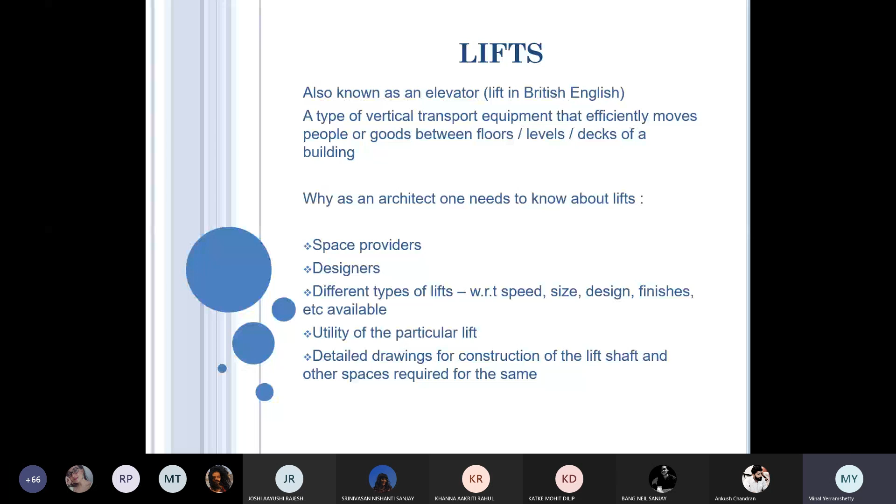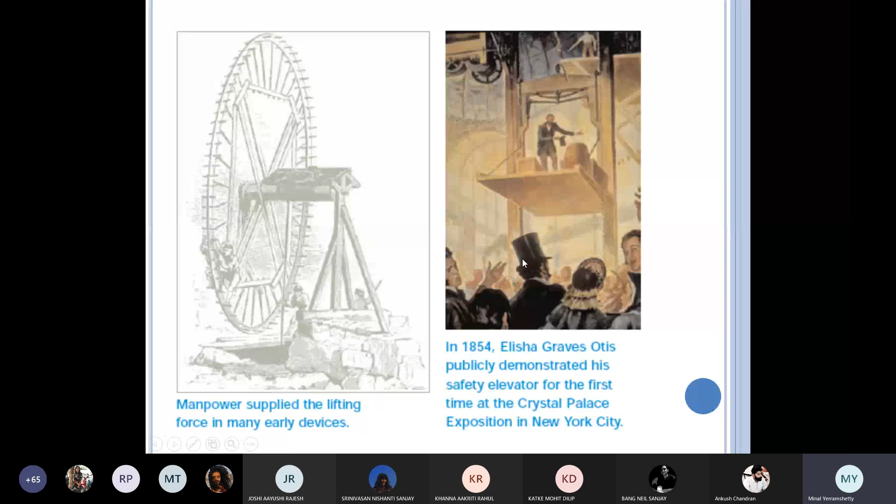Can you see the change here? This is some history where I'm sure in your TOD all of you have learned about the Crystal Palace exhibition that happened. It was a big talk of the town, a wonderful building created and then destroyed, all that happened. So this was the time when the first lift was actually used. On the left hand side, you see people manually rotating that wheel, like a London Eye you have in London, which is obviously now operated by machines. But this was how they used to have it in olden times. Based on this, you get an idea of how people would use lifts in the olden days.

These are some of the earliest buildings where lifts were used in a very preliminary manner. If you've seen this picture, in any old movie, or even a recent movie like Kahani, in which I think Vidya Balan acted, that lift box was really old. Kolkata has all these colonial buildings, so it was one of those buildings. She stayed as a guest there, and the lift actually still belongs to the colonial era. It was like a big box, like a room, which was going up and down. It had this big jali, a collapsible grill, which would open and shut, no doors, and you could actually see the whole thing happening. So that was how an old lift looked.

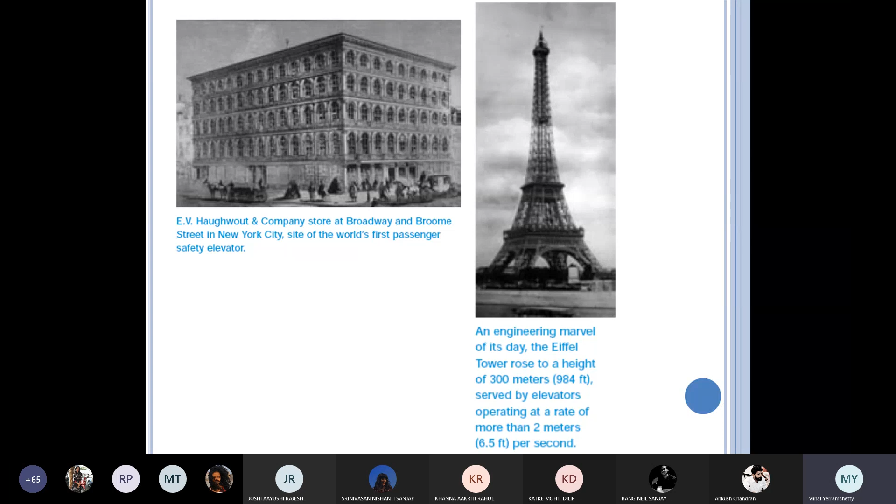So you can see that even the Eiffel Tower is so old, and at that time, at 300 meters, they had already kept elevators there.

Let's look at the types of lifts we have. Every one of us is aware of this - the passenger lift. That's how a normal building will have it.

Passenger lifts will depend on the building. If it's a very large building, say G+10, G+15, G+30, depending on the number of flats per floor and people in the building, you'd have a lift for 4 people - a chota sa lift. You could have 6 people, or 8 people capacity. But that's the limit - you won't have 10, 12, 24 people.

That happens in a very large institute or where traffic is very heavy. No matter how big the residential building is, traffic will always be nominal because only resident people will be coming. Half, or maybe three-fourths of people are not working - children, old people, you minus them out. Majority of housewives in the Indian context will not be working. So the peak time only caters to people going to office - it's not so heavy traffic despite being tall with large density.

But the same building with the same density changes if the utility changes - say it's now a mall or an airport. Suddenly the lift sizes have to be bigger because at certain times the density that needs to be catered to will be very high. Say there's a Diwali sale, or a Christmas sale, or a new trend now - a July sale, because in the monsoon nobody goes out, so they tempt people to come out. That's how malls function.

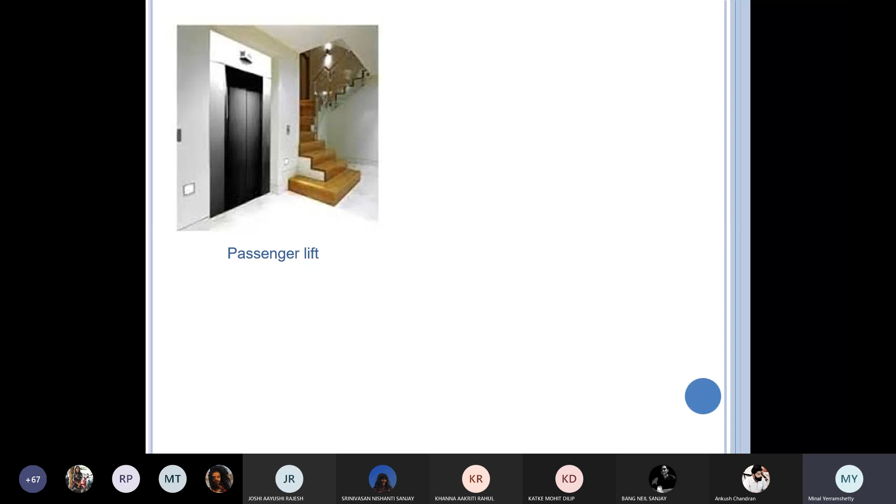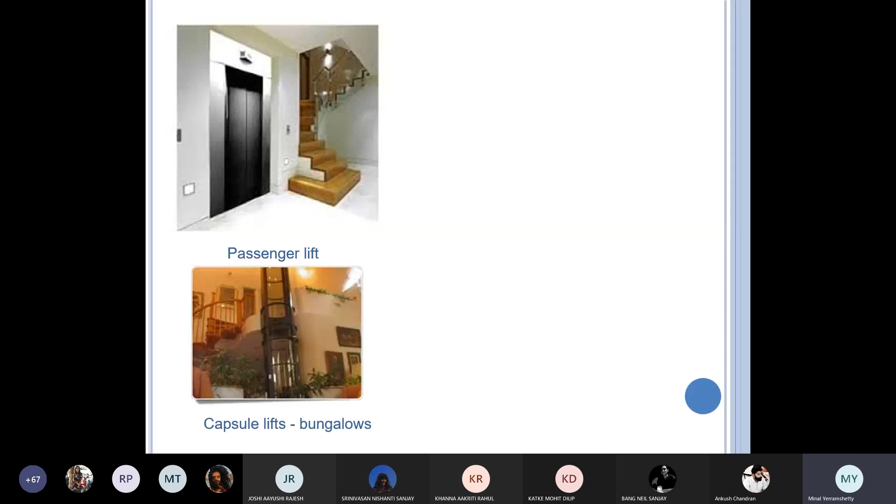So depending on the height of the floor, your passenger lifts are planned. You have capsule lifts for bungalows - where you have a very lavish kind of bungalow, G+2, with lots of rooms and a centralized atrium. Then you'd go for a small capsule lift which can even work for small bungalows, or you can go for these kinds of capsule lifts in hotels or any building.

I'm just saying hotels, but it could be for hospitals, airports, or any kind of tall building you need to go for. Basically, a capsule lift allows you to have a view, so it's very decorative in function. Of course its function is to take people up and down, but it's also a very decorative feature of the building.

Generally it can be faced either interior or exterior. If interior, you need an atrium so the lift faces the atrium, and while people go up and down they can view the entire inside of the building. If exterior, obviously they see everything around. That's how it's planned. Definitely you would not place a capsule lift facing a corner of the floor - kuch nahi dikhega, pointless hai.

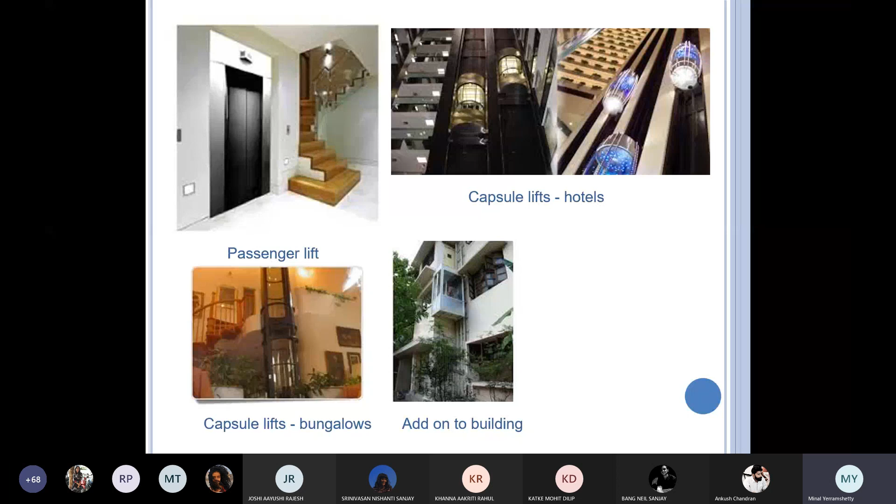But one has to be very careful while planning this, especially with material. Imagine this door opening - people could fall if any malfunction or technical problem happens. At least in a shaft, people will not fall off. Second, if this is glass and it gets broken, and a naughty kid traveling tries to look down, bends over and jumps down - it's a problem. So this is a little dangerous from that point of view. But otherwise, this is the cheapest way of installing a lift in an existing building if the need arises.

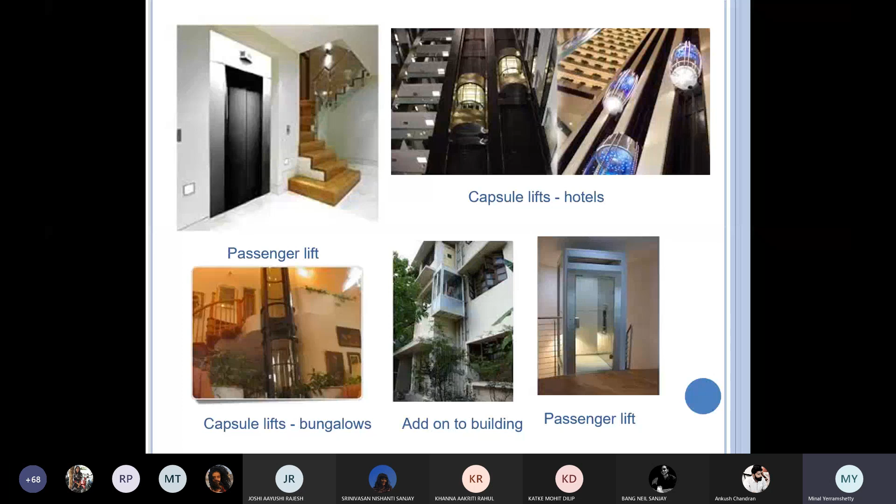Another view of the passenger lift. What you see here are the number plates on top. Sometimes you see a number plate on the side showing which floor the lift is on, so you can at least judge how much time it will take for the lift to come down. So all that is an accessory that needs to be there with your lift.

And the types continue. The other types of lifts that we see in different kinds of buildings, which we as customers generally will not see, are the dumbwaiters. Dumbwaiters are used in extremely high-rise five-star hotels or eateries of that kind.

So say in a mall, the kitchen is located elsewhere for safety reasons. The fire officer said you can't have kitchens on top, so the kitchen has to be at the basement or ground floor. That part of the mall area is cordoned off for services, but the cooked food has to be taken up ASAP. That's where dumbwaiters are used.

Basically, it's nothing but a lift that is programmed specifically. The size allows a trolley to enter along with a man. If you see the outside, there is generally a sloping kind of arrangement, or the lift has to be programmed very precisely.

Sometimes lifts do not align exactly with the level of the floor, maybe due to some technical problem. But in dumbwaiters, it has to happen perfectly. Otherwise the trolley will move, and say you are carrying soup, a little jolt and everything will spill. So it has to be very precise, and that's why that slope and everything is managed.

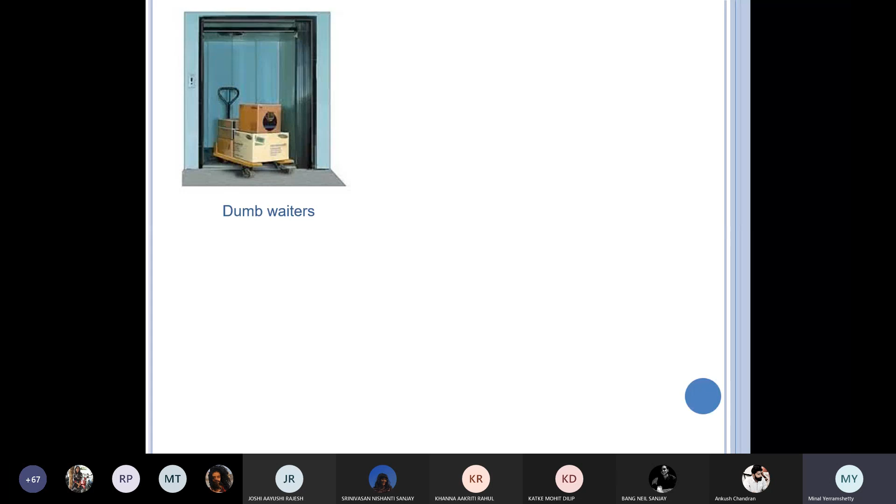That's why the Taj charges you 7,000 per day, because they give you that kind of service. You would get very piping hot soup no matter what time of day. So yeah, that's about the dumbwaiter.

Then there are car lifts that you see nowadays, something called hydro jacks, which is a hydraulic jack, seen in car parks especially in Mumbai. This has become a very popular way of parking cars, where you just drive the car onto the jack, park it, come out, and press a switch, and the whole thing rises up so another car can come down and park.

This way you can use the space very well, but what about the height? To utilize height, since Bombay has a space crunch, these are some of the methods being used. Now, instead of just having a rack, if I cover the rack with a room like this, it becomes a car lift.

The function remains the same as a lift, but this is as big as the largest car, and it goes up and down. Again, if you see the edge of the lift and the floor, there is a steel plating there. This is a very rough and tough area with a lot of maintenance required as a whole car comes out, so anything can go here. It's meant to be very sustainable and very strong, and that's why generally a steel plate is inserted there.

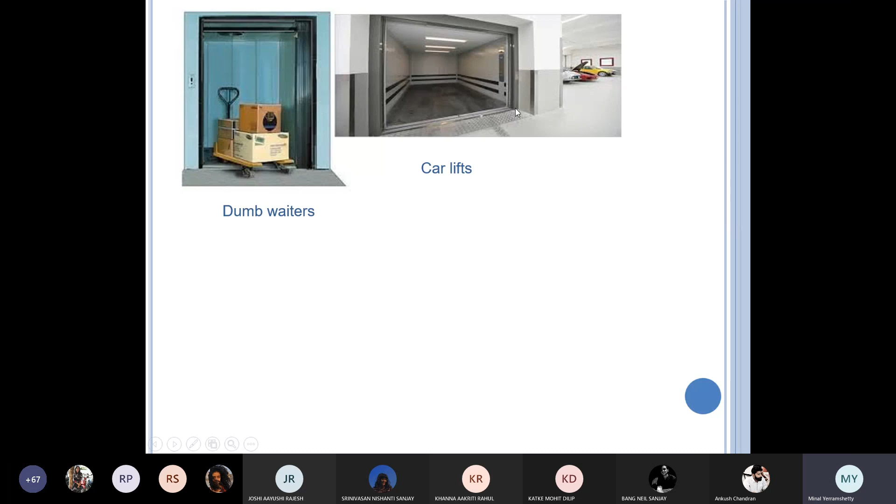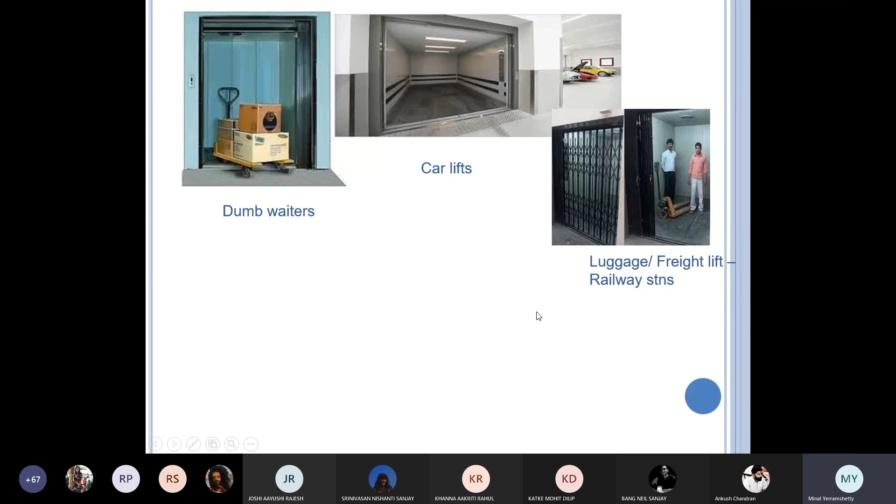This is a luggage or freight lift, railway station. Coolie people use this. Or you will see this even in an airport area where you have to take huge luggage from where you sign in to where the cargo is happening. You will not be using these lifts, but the people who are taking your saman from where you checked in to where the plane is resting, if it is up and down, will have to use these kind of lifts. Otherwise, those small lifts would need too many trips to get 200 people's saman out. So these large lifts are known as freight lifts or luggage lifts, used mainly in metro stations, airports, or wherever you have warehouses.

Stair lifts are for accessibility purposes. So old people, or even young people who are having some major health issues, or physically challenged people, for them these are the new kinds of accessible lifts that are available. All you need to do is install a track on the side of the stairs, and you fit this thing there.

It's just that this is very inviting trouble for children. The children would love to operate this and kind of play with it, and that's where the problem lies. So one has to be careful - this has to be monitored.

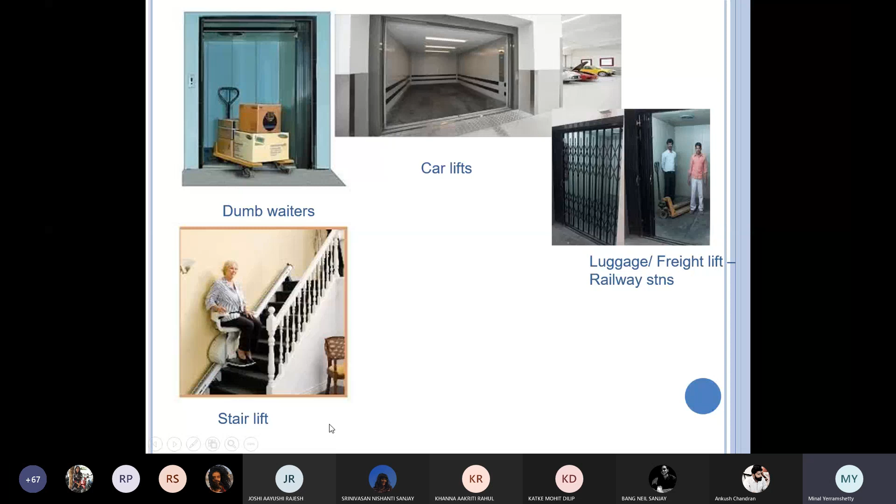The stretcher lift that I was talking about, for hospitals, is a very narrow kind of thing. So here too you will probably have one stretcher lift, or a stretcher lift which has two stretchers simultaneously going in. If the hospital is catering to really heavy loads, you will have people coming and asking certain things, because they can tell you that if I have to take one stretcher from say fifth floor to 10th floor, traveling 5 floors, what would be the time required?

When you are preparing patients for operations, the minutes matter. Sometimes they are in a crucial position, and if they have to be transferred to the operation table, that is very crucial. So these are the people who can actually tell you what will be the time taken by the lift from fifth to 10th if it is going straight.

Sometimes certain lifts are programmed in a hospital such that if the operating tables are at a certain level and ICU is at a certain level - generally ICU and operation should be together, but if they are not for whatever reason, then direct lifts go there. So nowhere will it stop. The control will be only from within. So even if I keep pressing, it will not stop, because somebody else inside who has higher priority to reach the operation table has already pressed the operation table floor.

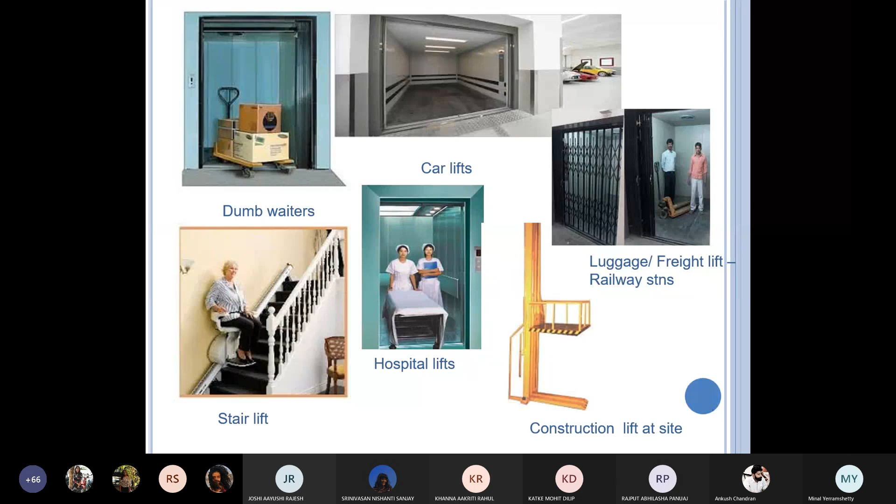So the different types of lifts we covered were passenger, capsule, and fire lifts. Fire lifts we already finished discussing in the fire section.

So customized lift, if I have to tell you, it is like this. Say you are assisting somebody, a king of Estonia. I'm just saying, probably there is no king there, but if you are the architect assisting him, and he has ordered a suite in Taj at some level, there will be specialized lifts going to that level, only for VVIP, very very important persons.

For them, customized lifts will come, and designers go mad, using lavish kind of material. There will probably be sofas inside, because the person will not be able to stand when it has to go from zero to say the 28th floor. So there will be nice seating available inside because it is customized. You can do what you want, maybe even put a bar inside. Who knows, I've not seen it, but I'm just telling you. Customized lifts have no limits, it is up to you.

So essentially, what I want you to understand is, if it is a nominal lift, you will have proper brochures available. You can see famous lift manufacturers here: Otis, Kone, Schindler, Mitsubishi, ThyssenKrupp, and many others. These are some of the most famous and the best ones, and there are many others.

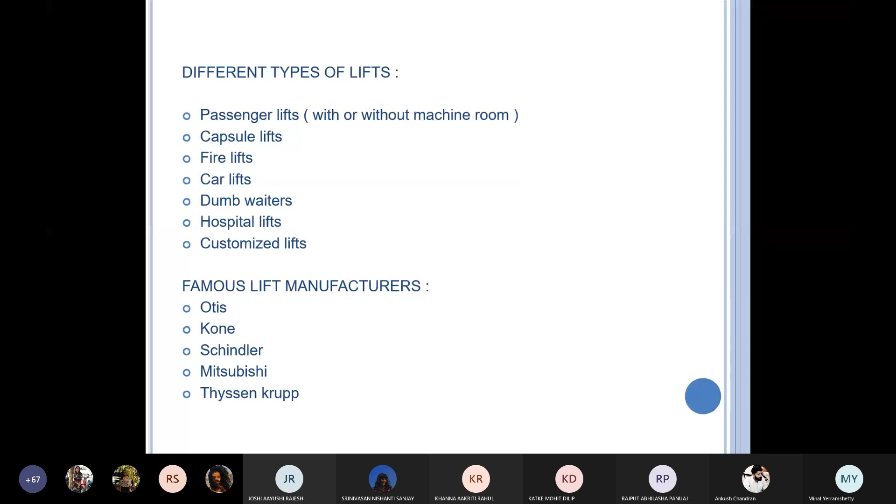So how do you select? You have building height, definitely, because height will increase the density. Occupancy load, as I already said, is not a problem in a residential building because it is fixed: this many flats, this many people.

But not so in a mall, because during Diwali it is going to be a mad rush there, but otherwise nothing happens. So when you have to struggle with this kind of floating population, it's a big problem of assumption. Even architects are not the right people for doing that, so you will have to figure that out, and we have people who will help you with that.

Customer expectation, what do they expect? When I talk about speed, I'm talking about hospitals. If I'm talking about capacity, I'm talking about malls. A person who goes to a mall doesn't care much about speed. He is not in pain, he doesn't have to go operate some crucial operation, nor is he in need of any medicine. It's nothing like that, he is there for loitering around, but you would still like to go there.

So capacity matters, so a lot of people can be taken care of at one point in time. It is cheaper for them also, same electricity and maximum transportation of people. So yeah, quantity, capacity meaning number of lifts. So based on speed and capacity, your quantity, meaning number of lifts, has to be calculated.

And then of course, my prime problem as an architect is space limitation, so how much space you can give is something you will have to arrive at. And that's where I keep telling you that when you have a space limitation, it makes sense to have a bank of lifts, instead of one lift here and one lift there.

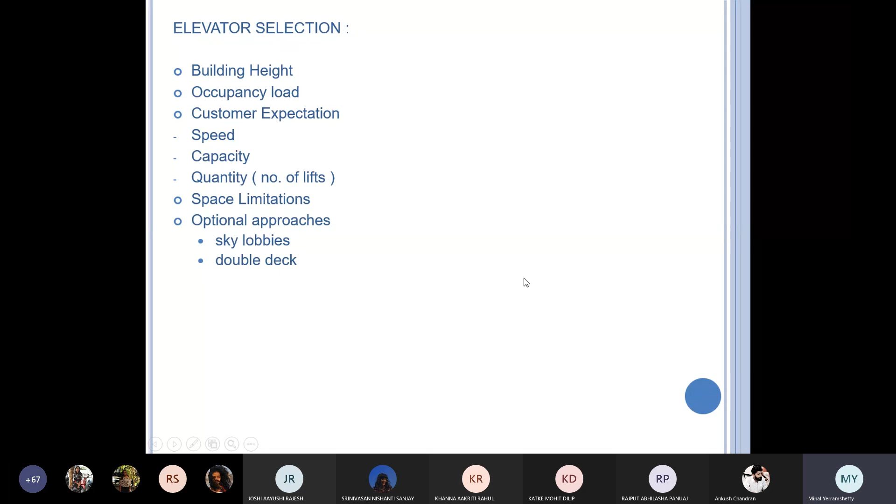There's a space limitation. Then there are optional approaches like sky lobbies and double deck, which I'm not going to speak about now. This is a bit advanced, but it's quite nice - if you see the way the lift guys have come up with designs, it's really amazing.

Now, some of the bylaws that are there: NBC, the National Building Code, all of you know. Municipal bylaws, as I keep telling you, will be different for different cities. But there are a few points one has to remember.

One lift is required for buildings more than 16 meters in height. If your building is 5 floors, 5 times 3 is 15 - 3 meters is the general floor height everywhere in India, more or less. If your building is 5 floors, people can easily walk up to 5 floors.

Though I would say in today's day and time, with the kind of lifestyle all of us are adopted to, 3 to 4 floors is good enough - the fifth floor becomes too much. But anyway, the bylaws say to be healthy, and if it's above 16 meters, you must put a lift.

2 lifts are definitely required after 24 meters of height, and one of those should be a fire lift, because after 24 meters your fire situation or fire requirements begin.

There's also provision of a grounding switch for emergency. What do you mean by grounding switches? If a switch is there inside the lift, if I press that, it will come to the nearest floor landing for me to escape.

Now, it can be programmed differently. The other program says it will come to rest only at the ground floor and not any other floor. Maybe some buildings will have such requirements.

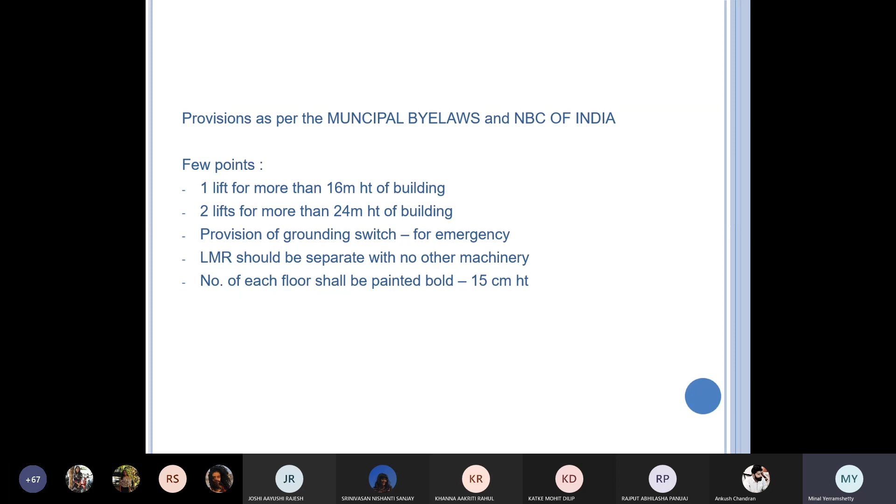And please guys, the hole should be exactly one above the other - it can't shift even 1 mm here and there. Otherwise, there will be chances of accidents.

Provision of lift shaft - and the reason I'm telling you this point is we have seen drawings like this. This happened at the final year level, and it was really hilarious.

Later it turned out that the drawing had shifted, but it had happened, and that guy didn't realize he had made this mistake. So obviously you could see that the lift shaft on the fourth floor had shifted from the third floor - but a lift won't curve around like that, it goes straight. So be aware of that.

So, provision of lift shaft, provision of lift pit. What is a pit? Have you seen a lift pit? Anyone, guys?

Why is a pit required? When the lift is on the ground floor, the machinery is below the platform. But have you seen what happens in the lift pit? There are springs.

There are two springs. So basically, suppose God forbid something happens, and the counterbalance steel ropes break, and the lift box just comes down completely. Can you imagine the jolt that will happen? People will die. Even with the spring, they will die, but at least the chances of dying are less.

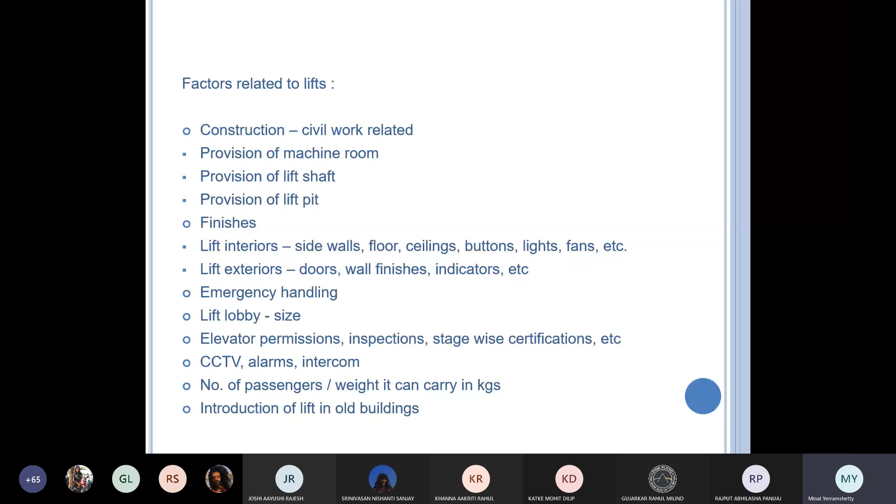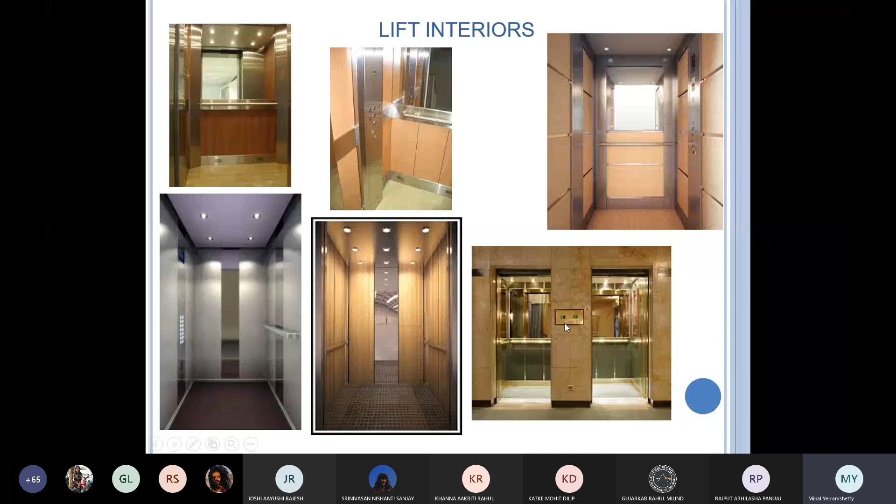This is what you will need to do. If you're not aware of what a double decker lift is, fine, but this is what you need to know - how would you then see outside if this is the panel? So this is complete granite paneling they have done, with a cutout in the center where all the indicators and everything is handled. The switches which call the lift down, up, whatever, everything is done. So all this is what you will have to design when you do this.

Either you don't have a machine room given, fine, or if it is there, you have to raise it from the terrace floor by at least about 1.2 meters, if not more. 1.5 is good, but if that can't happen for whatever reason, at least 1.2 meters you will have to lift it from the terrace. So when I have to go to the lift machine room, I will have to take steps - you can put metal steps, or you can have PCC or RCC, something you can devise and detail. But essentially my lift machine room is at a height from the terrace floor. The reason is I have to accommodate the length of these cables.

Then, have you seen Bollywood and Hollywood movies where the hero has to escape or the villain has to escape? They go on the lift - have you seen any movie where they travel on the lift? Does anybody remember any movie?

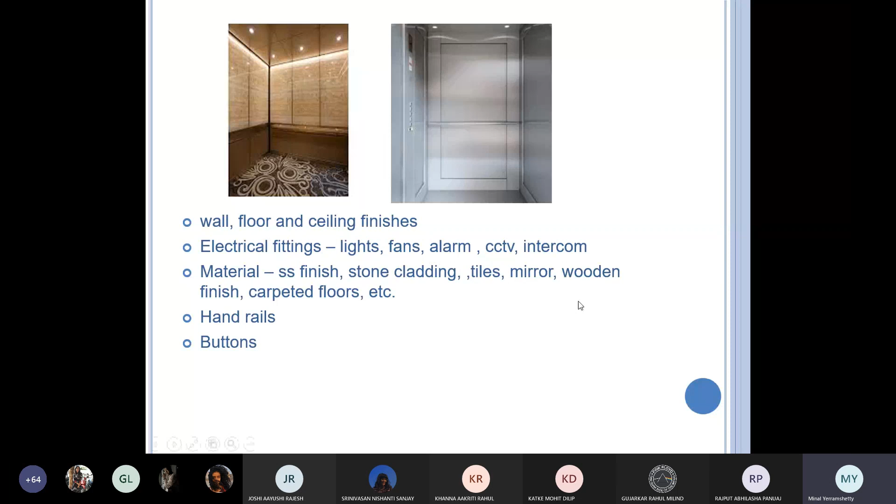Handrails - why handrails? You will see in certain lifts there are handrails. This is generally for the handicapped, and there are a lot of machines and finishes involved.

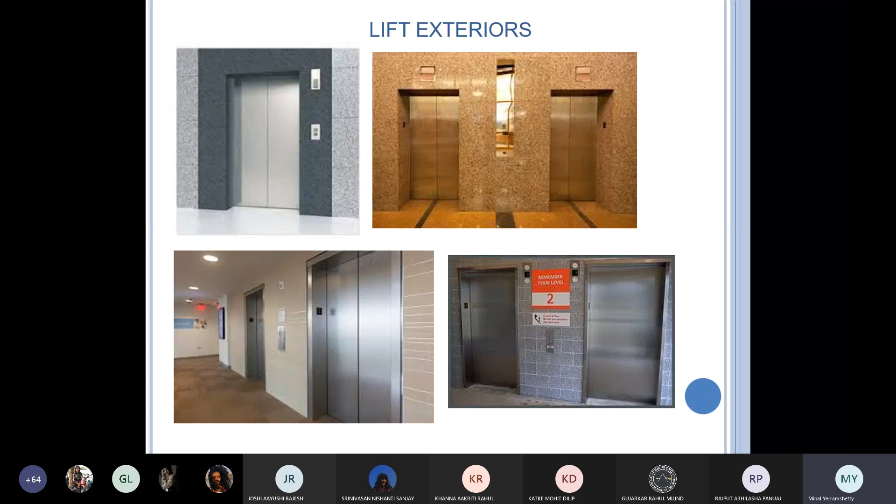Exteriors come in so many different kinds, different colors, different materials - there can be 100 others. This is called a lift bank, all in a row, versus this, which is a single lift. A single lift generally happens in a residential setting, or this could be a customized lift going to the suite area where the king of Estonia is staying. The rest is for people like us.

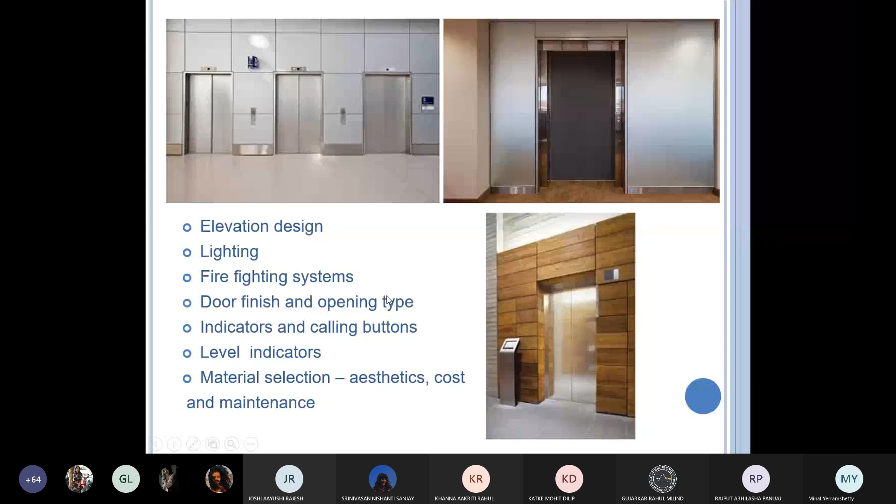So you have to think of design, lighting, firefighting system, door finish, indicator, calling buttons, level indicators, material selection, maintenance and cost - very important. Cost and maintenance is what drives the material choice.

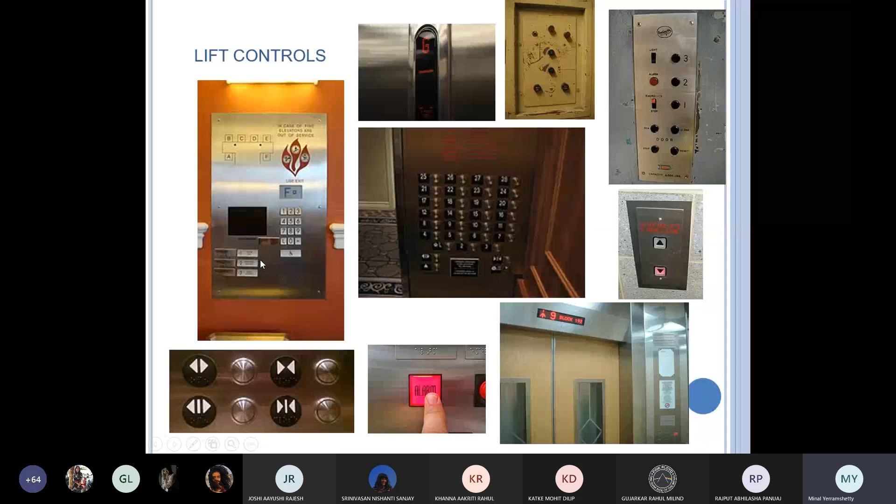Do you see this fire sign here? It's written 'fire', right? Yeah, anything in red is for fire. These are again the panels, sometimes inside, sometimes outside - these are the various controls used to control the lifts.

Now coming to the types of lifts based on how they function - this is a bit technical. Please wake up. If you're feeling very sleepy, ask your moms to get something to eat so you can eat and stay awake.

The first type of lift is hydraulic lifts - they use a cylinder operated by movement of liquid. These aren't used much nowadays. There are hole-less hydraulic lifts, whose speed is hardly 20 feet - very minimal, a person would get bored inside. Very slow, speed 100 to 125 FPM, sorry, the rise is 20 feet - meaning it's only suitable for a small building, cannot really go high, cannot help high-rise buildings.

Only for low-rise buildings. There's the hole type hydraulic lift, and then roped hydraulic lifts. Basically, the movement happens because liquid shifts from one place to another. When the liquid shifts, it bears weight on that side and pulls it - so it has to be a huge tank-like thing with enough weight to do the rope-pulling business. That's how it works.

So that was your hydraulic lift - lifts working on hydraulics. Hydraulic means working on liquid, hydra meaning liquid. Then you have traction lifts - these are basically electronically pulled ropes, like what you see in a normal building.

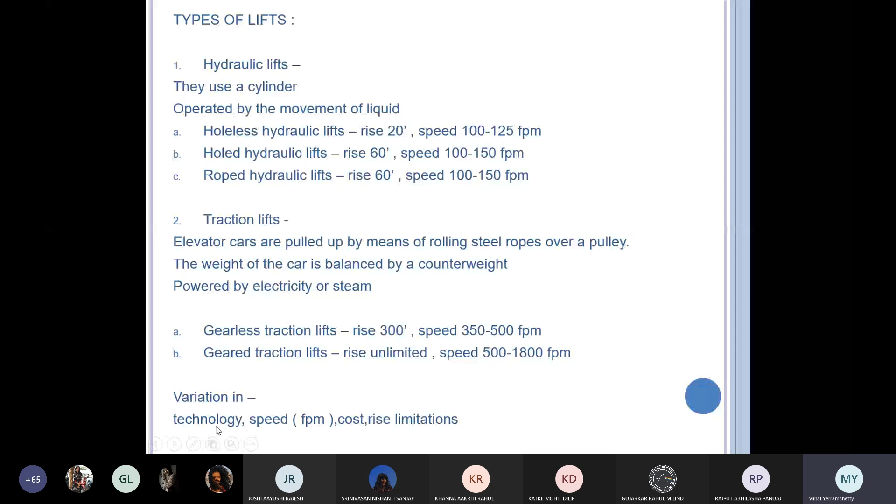Variations can happen in technology, speed, cost, rise, limitation. So these are my constraints. Also my variation will occur because of this. So these are the reasons for the variation. Why will I choose that? Because maybe my costing is a problem. Why will I choose that? Because I need that technology. So why do I need that technology? Because I need to take more people up, I mean to the floor.

Yeah, so this is how it looks - hole-less hydraulic, holed hydraulic. You will not see much in this thing, and this is actually not your job. I'm just trying to show you what all things are there.

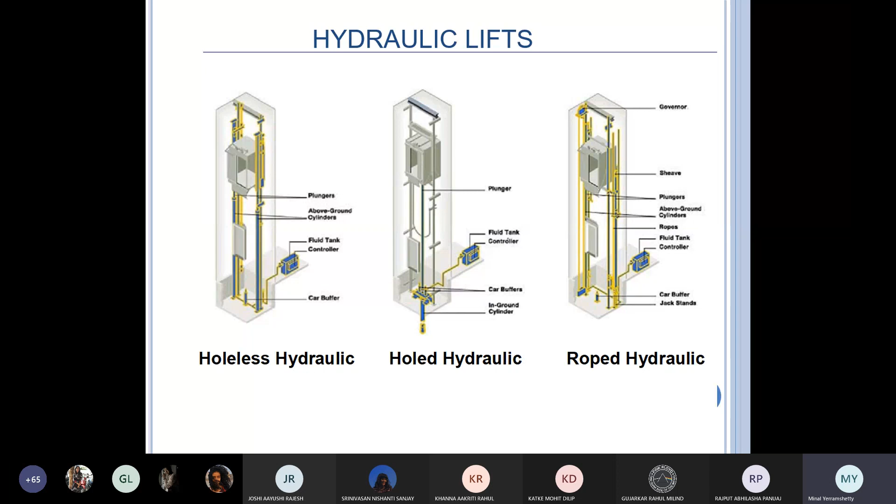So you will see the machines happening here. These are the fluid tanks that I was talking about, the blue things are the fluid tanks. And this is what we call a governor, which is the top rail, which governs your track on which your lift box moves. This is how your things will move. This is an extremely technical engineering drawing, which is not your job, so even if you don't pay attention here, it's fine. Just understand the three names and it's good enough and you're good to go.

Traction lift ke kuch jargon samajh lijiye jo aap use karenge. So when I say buffer, that is the lift pit that I was talking about. So when I say buffer, it's nothing but a lift pit. I already said, so do you see this black thing? Of course, it's green in color generally, but it is generally painted black. So it is the counterweight. So as this comes down, its weight comes down, then the lift gets pulled and goes up. When the lift comes down, this goes up. So that's how the counterbalance works.

And how does it work? It works on the guide rail. It has to be guided, right? Otherwise it will become like a pendulum. The whole box will also start moving, and you will feel as if you are riding in a pendulum. So that shouldn't happen. So there has to be a track. So those are your guide rails between which your counterweight will go up and down. Similarly, your box also will have that. A governor is what will guide your box, and tracks or rails is what will guide your counterbalance. And on the top, when I was talking about that lift machine room, this is that machine.

Now this machine is basically doing nothing but pulling this counterbalance. Its job is not to pull the box, it pulls the counterbalance. So behind that, the counterbalance has a rope attached, and that rope is made up of thick rolled steel. Why steel? Because it can be malleable, it can be wound around it, and so on. It is easy to pull it on the trolley. It is good to pile it up on a pulley, that happens in the lift machine room.

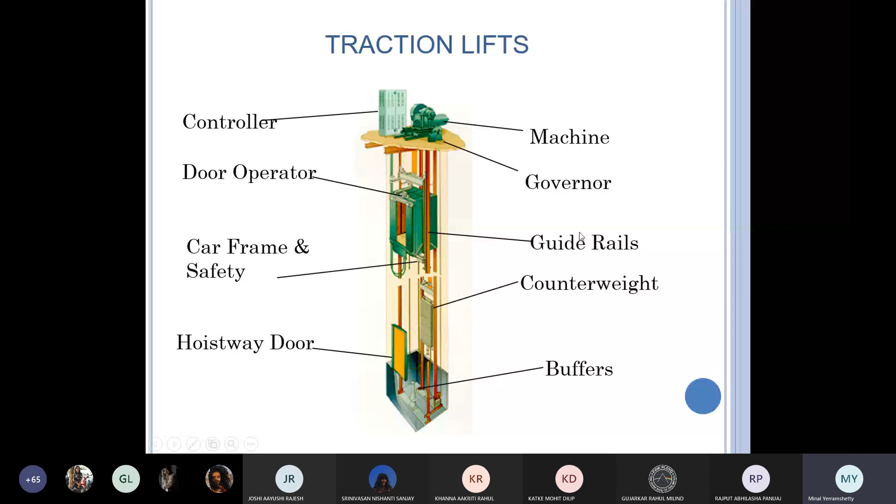Coming to the traction lift. So you see this machine on the top, okay? Now you see this pulley I was talking about, and the counterbalance's wire at the back goes down. Where this wire enters the slab, there you will have to provide a hole. So when you do your working drawing, you need to be very clear where to show the cutout in the slab. That is the reason why you should know where should be the machine room, where should be the cutout, how high should be the machine room from the terrace floor.

Actually, in the drawing, I would have loved it if they had shown the terrace level. Then you would understand that this slab on top is at least 4 to 5 feet, that is 1.2 to 1.5 meters, above your terrace floor. Yeah, so this is how things happen.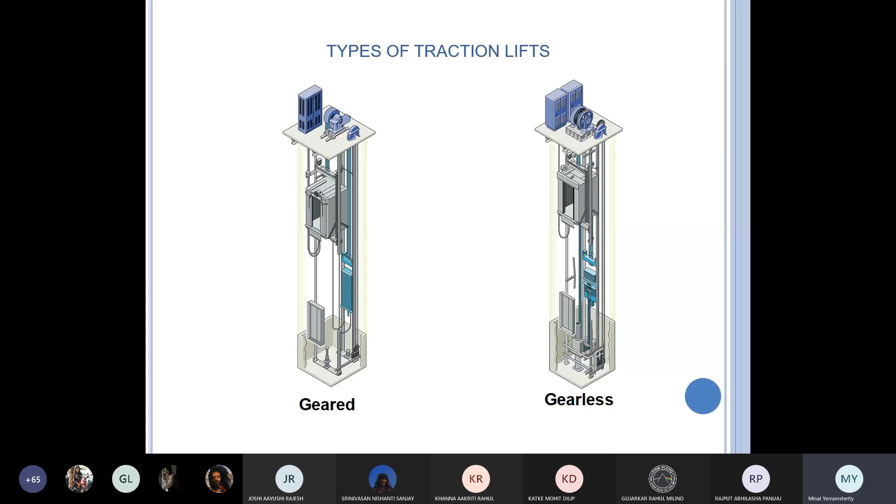MRL lifts meaning machine room less lift. MRL meaning machine room less lifts. Okay, the entire drive system is in the hoistway or the shaft.

Now suppose I have some problem - I also need to use my terrace. Okay, as an architect, or as a planner, or as a community planner, I say okay, I have a beautiful site, a lovely scenic site, and I want my terrace to function as a nice restaurant. Or it can be opened up as a venue for people staying in the building, and they can utilize it as a wedding venue or whatever. Now, if I have a machine room sitting there, it's not a very good view, right? So I don't want the machine room. So what do I do?

What you need to do is use this technique, where you get lifts which do not have the machine room. Why? Because that boxing you used to see on top - all those things - is now fitted within the shaft. For that, you will have to increase the shaft size, that's all you need to do. The entire drive system, the thing that drives the pulley, is in the hoistway or the shaft. Hoistway is nothing but the shaft.

Okay, the equipment is similar to a normal traction elevator, more or less it is similar. It definitely creates more usable space - I already explained that I can now totally use the terrace. It uses less energy, okay, I don't need to pull all the way up - it stops at the terrace level and I'm done. 70 to 80% less than hydraulic elevators.

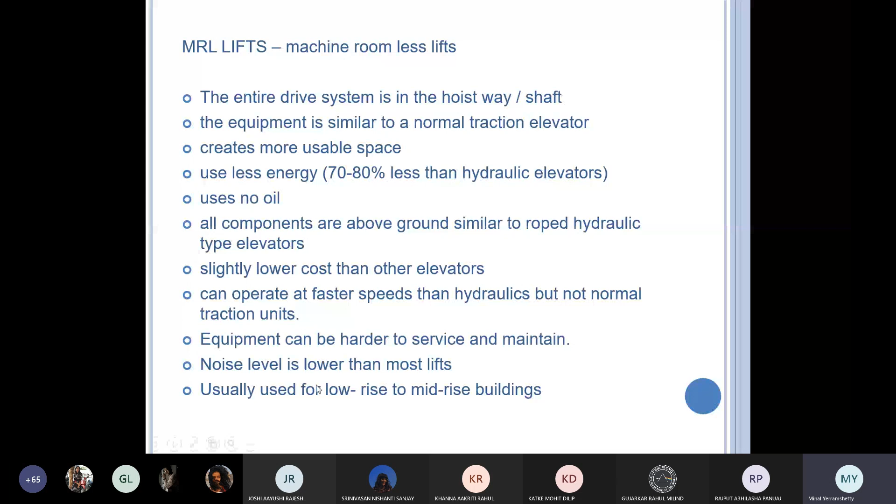Noise level is lower than most lifts, and this is usually used for low-rise to mid-rise buildings. As I said, it's not as fast as traction elevators. So obviously, if the building is high rise, I need speed, otherwise I'll feel nauseous inside. So I don't want that. That's the reason why it has this limitation.

Machine room-less elevators look like this, more or less the same. But now, instead of that huge machine room on top, the whole machine, the pulley, is inside the shaft, sitting along the wall, parallel to it, so it doesn't jut into the shaft. Outside is my governor, which takes the lift box up and down. This is how it looks, and this is how it looks from behind - in front is my lift box, and behind it I see this traction mechanism. Here is my counterbalance, this is my pulley, and the whole thing works within. I don't need a lift machine room on top anymore, because on top was where the pulley used to be and all the required machinery operated. Now this huge pulley sits within the shaft.

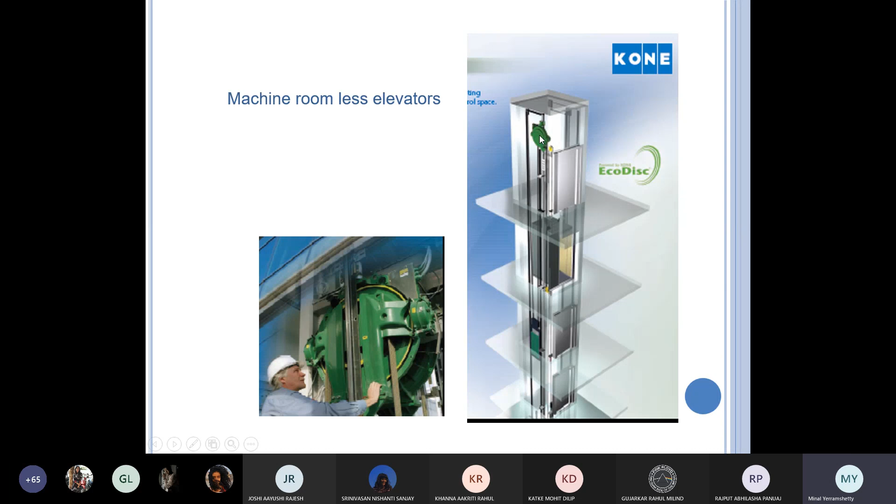That's the difference. Typical section through a building showing a staircase block with OHT above. So this is my staircase with the OHT above, and next to the staircase is my lift shaft with the machine room on top.

Now see this? See the level of the slab here? The slab is about 7 feet high, because when I'm standing on this terrace, I need a certain height here. And when I come out from here to the terrace, I need at least the door height, that means 2.1 meters. So if that's the level, then this floor, my machine room, is also sitting at that level. That means I'll need steps here. So if I'm standing here and have to go to the machine room, I'll have to use as many steps as are needed for 2.1 meters to go up there.

And below, you'll see your pits. This whole thing is nothing but shear walls. Now, it need not be shear walls. The construction can be nominal - 4 columns with beams happening regularly, and then you can have infill of either lightweight concrete or brick walls, anything. People opt to go for shear walls because, as I showed you in the 5th semester lecture, Charles Correa used the lift pit as part of the structural design. So if this has to support other beams coming here, it can serve as a structural core. That's why people opt for this as a shear wall, but it's not a necessity. It's not that just because there's a lift, you must put in a shear wall.

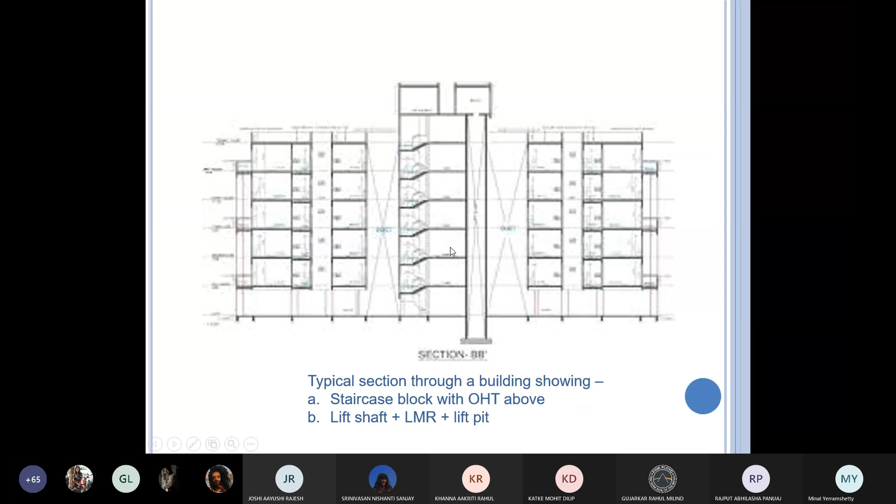Okay, and these are the minimum dimensions. I am not going into detail here because every brochure will have different dimensions. You have to address that brochure, use those brochures available online. If you are using Otis, it will have a different dimension. If you are using Schindler, it will have a different dimension. But basics are there, your ergonomics are there. So if you are giving me a disabled lift and then you give me a door of 0.75, you get zero - the poor guy won't even be able to go inside.

That's the reason why disabled lifts, or lifts which allow physically handicapped people to enter, will have larger doors, or they will have those collapsible grills which will be flush to one side of the door so people can enter easily without hassle. So if you are designing for a stretcher, you will have to take the brochure and design accordingly. If you are designing for a handicap person, you will at least have to see that the guy is able to maneuver inside - you can't give me a 3x4 toilet-like lift, though that is also available.

Many buildings will have only space for 3 people to go up and down - it's that small because the building did not have space. It was something called a development, where generally this is the case. Sometimes you do get lavish space, but sometimes there is a lack of space. It's such a tiny lift, there's no way it's capable - the person will go in and have to face the wall only. He cannot maneuver himself, and unless somebody pulls him out, he'll have to push himself out.

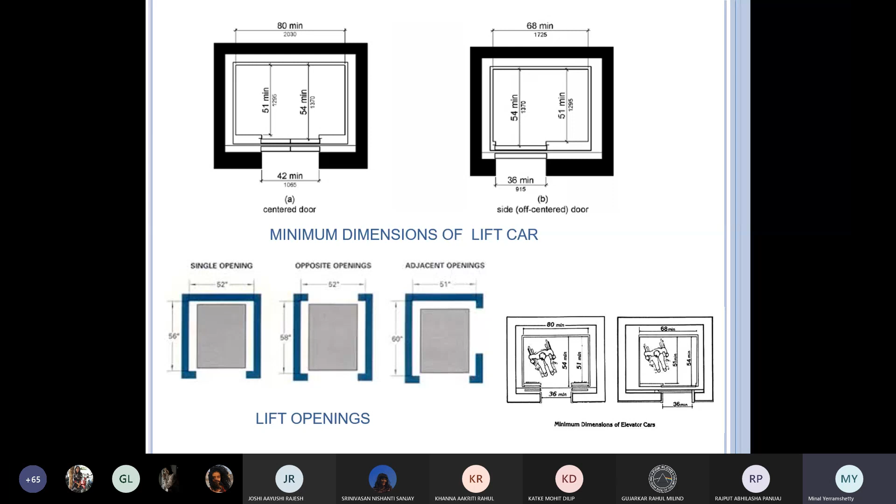No way. These are the sections - again, every manufacturer will have its own sections. They are the ones who are going to provide you with the box, and they are the ones who are going to provide you with the details. So please, you will have to address those details when you plan a lift.

But as a planner, you need to see that at the floor line - can you see my cursor - there's a 7 feet door, where there will be a hole in the wall. That means if you are making this as a brick wall, please provide lintels here. If this is a concrete wall, then please don't provide a lintel here. Otherwise concrete is above and a lintel is also visible below - that looks wrong. So these are some things as an architect, as a construction detail, you will have to provide.

Now, once the wall is done, remember all those finishes that we did? If I just give you a wall and say the working drawing is complete, you will get zero. How is this wall going to look from outside? Unless you say I want a concrete finish there, you want a VIP to stand there and see the beautiful marks of the concrete finishes - it's up to you, and it can be done. I'm not denying that, but it's your call. If that is the case, then you better do the finishing of that concrete in a really good manner.

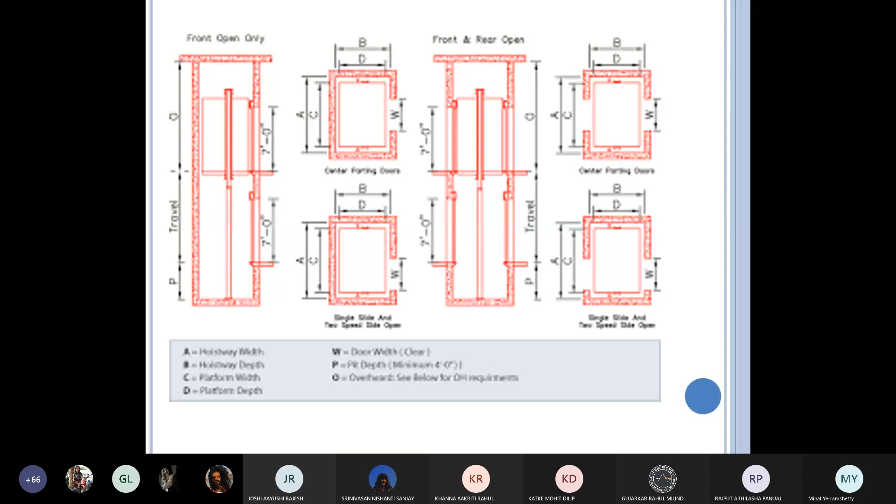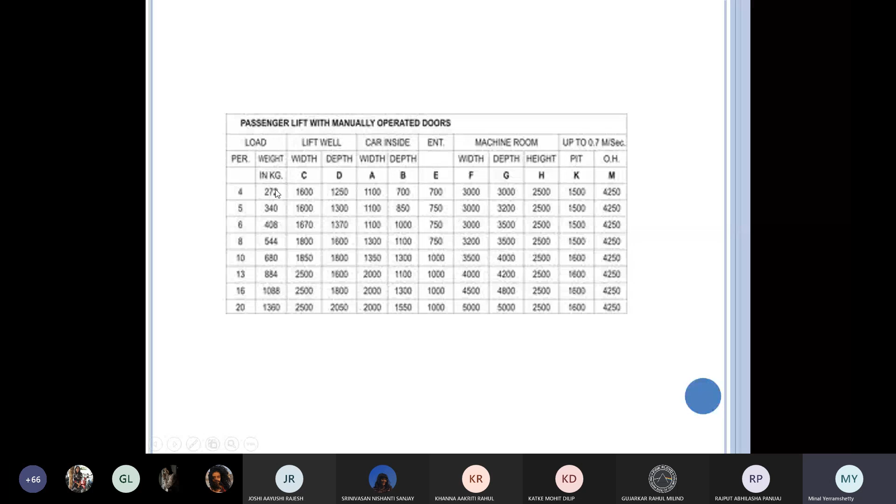Yeah, so this is again the lift - these are again the various dimensions that go with the brochure. This is just to show you how it will look, and this is what you will have to do. When I say 272 kg, that means it will have only 3 to 4 people. 60 into 4 is 240, so plus and minus the weight stays roughly the same, plus that guy will be there. So 272 means 4 people. That's how you will have to figure it out - these are the details that you will have to see.

So you enter, there will be some steps right outside the door. There will be a landing there. Whenever a door opens and if there are steps, there has to be a landing. I don't have to repeat this ever again, no matter what. Imagine you are opening a door and a step happens, you will fall down, especially at night time. So to avoid such incidents, you open the door, take a step outside, stand there, and then take a step down. So always have a landing in front of a door.

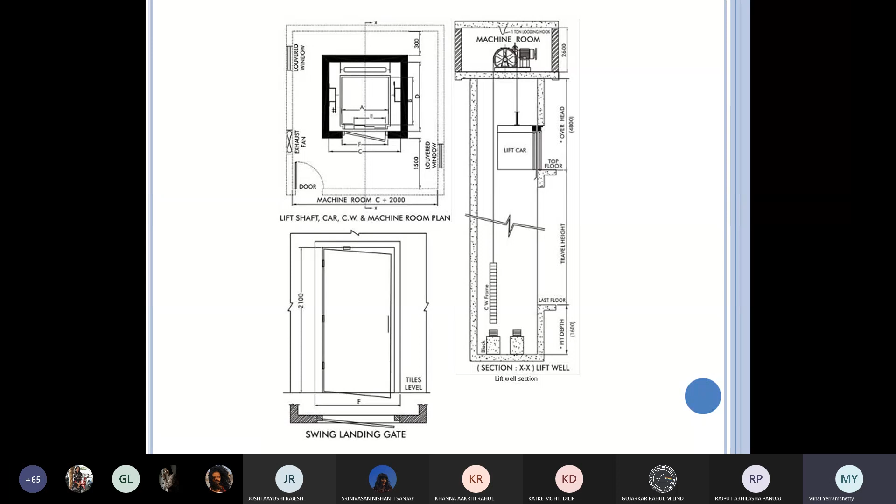So yes, there has to be a proper ventilated lift machine room. Keep these factors in mind when you design a lift. I should show this in a section. These are the various sections, trying to show you different materials.

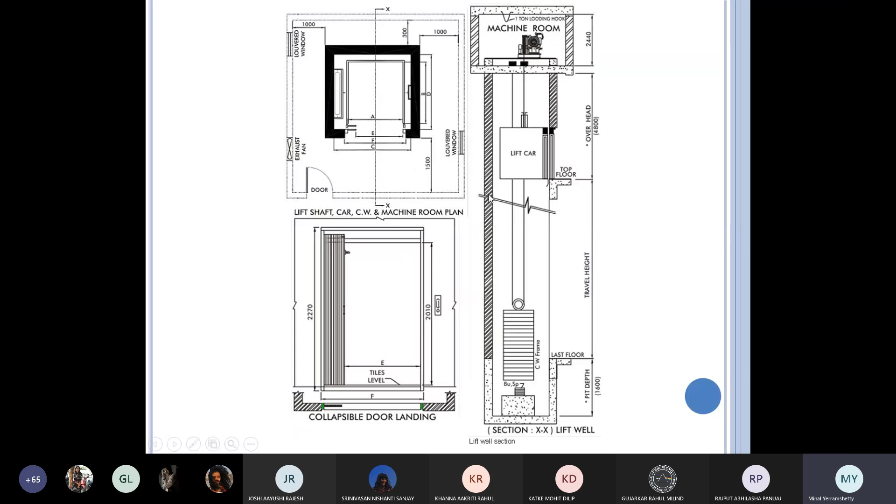So here, look at what they have done. This is a brick wall instead of what was there before. Sorry—yeah, this is an RCC shaft. The next one, what do they do? The next one has a brick shaft. The rest of the things remain the same. This is a composite shaft.

And this is from the front side, because I see the counterweight panel like this and not a thin line—this is from the front side. And this is where the top floor is. So if you see, this is the top floor, then the 7th floor, and somewhere here will be my terrace. If this is my terrace, you see the size of the lift machine room from the terrace. So this is all you will have to do when you do your working drawing.

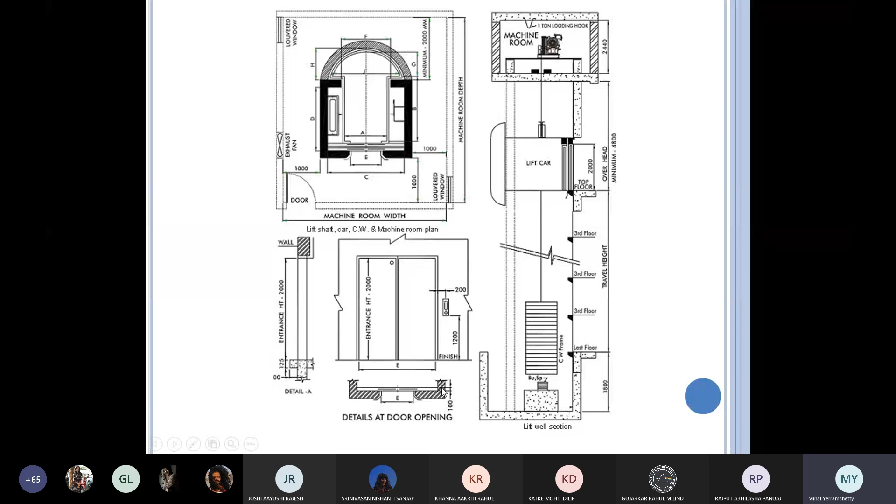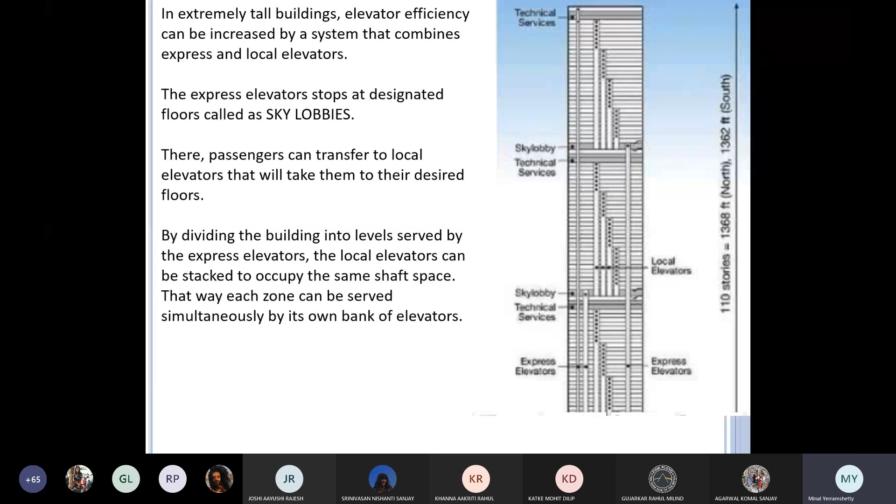By dividing the building into levels served by express elevators, the local elevators can be stacked to occupy the same shaft space. So either I can have a shaft serving many locals, or take the white one and the previous example - the white one which is stopping here - had I continued that upward, and the gray one were on top of the white one, would it work? Of course it will work.

So essentially, I am having only one shaft. Think of the drawing, think of the space horizontally - imagine how many shafts you would have to make. It would be a structurally chaotic situation when planning this. But instead, if you create only these 1, 2, 3, 4 straight ones, and then stack your local elevators one above the other, you can have minimum shafts with maximum output. That is what they meant when they say a local elevator can be stacked one above the other, servicing the whole building with multiple boxes in the same shaft. So that's how my lifts work.

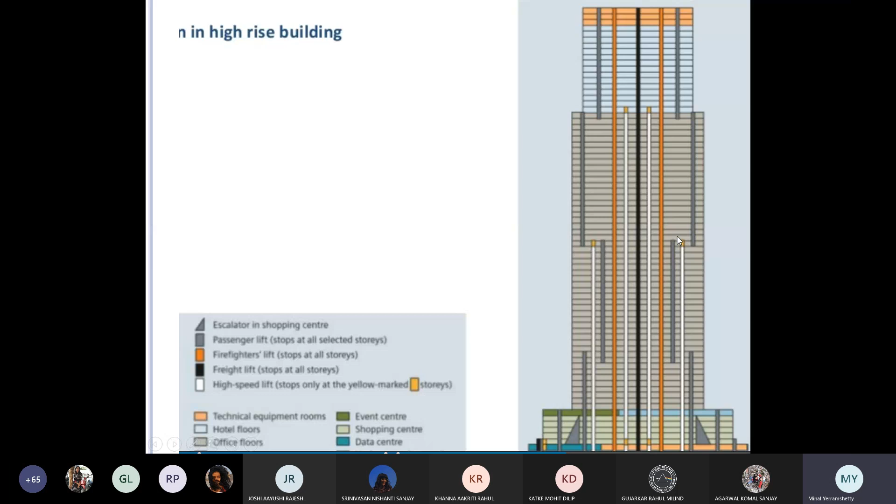So it's not so easy. A lift looks very simple, but when you actually sit and calculate, it's a task. This is exactly what it showed. So next time I'll show you the diagram, or maybe in final year I have a diagram.

I should have brought it here in my other PPT. It is there, so I can actually show that if you see my cursor right about the dark blue line - if I continue that shaft, all the light blue lines can come above it and work within that zone. You see those gray bands horizontally? Those are the zones, and that's how building elevators work.

So if I place one lift above the other, I can reduce it by half. I'm saving cost, and increasing efficiency to twice, maybe thrice. That's how things are planned. There's a name for it in sustainability - it's called integrated design process. How do you integrate two or three functions together to get maximum output?